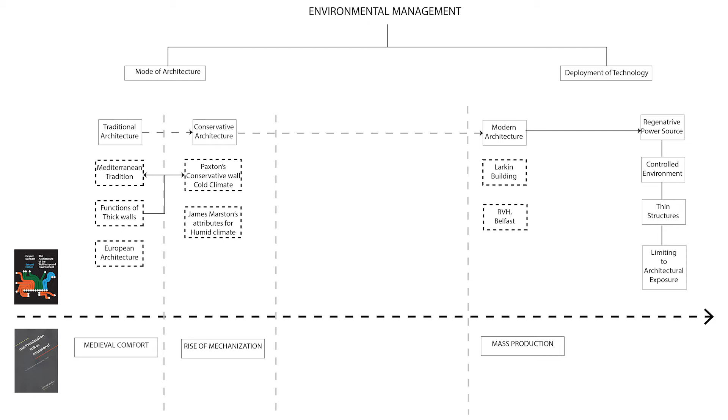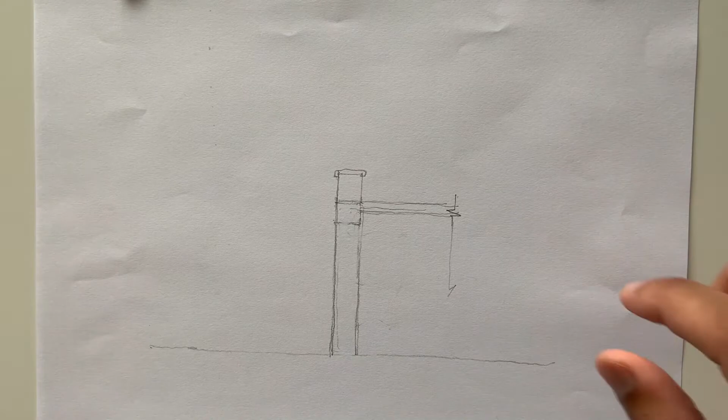Thick and weighty structures offer better acoustic and thermal insulation. These thick walls of a house in a hot climate will hold solar heat during the day, slowing down the rate at which the interior becomes hot. And then after sunset, the radiation of the heat into the house will help to temper the sudden chill of evening.

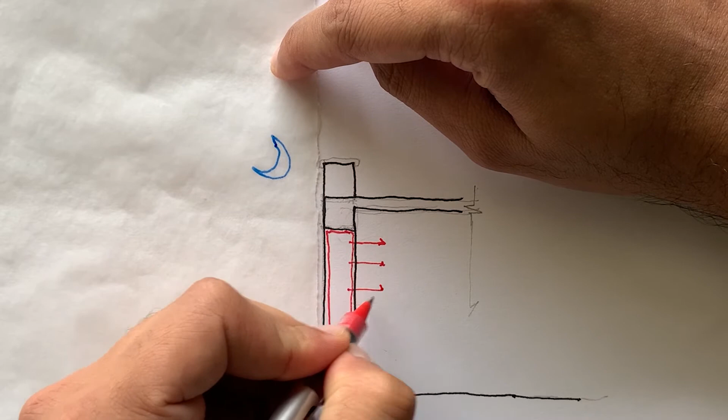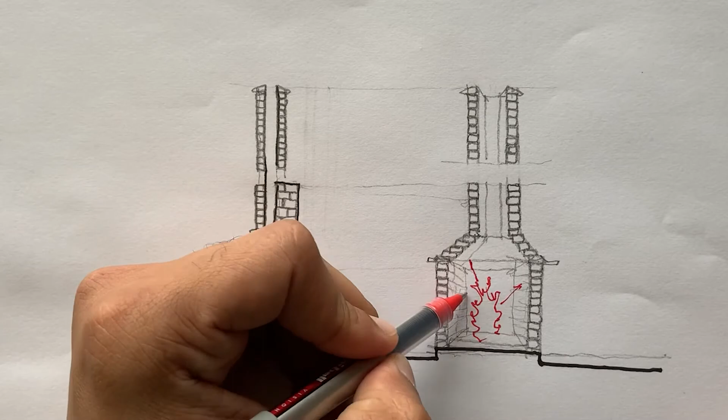Similarly, in European architecture, fireplaces work together with mass masonry and do not depend on solar energy, where the thick wall stores the heat of fire during the day and returns the stored heat during the chill.

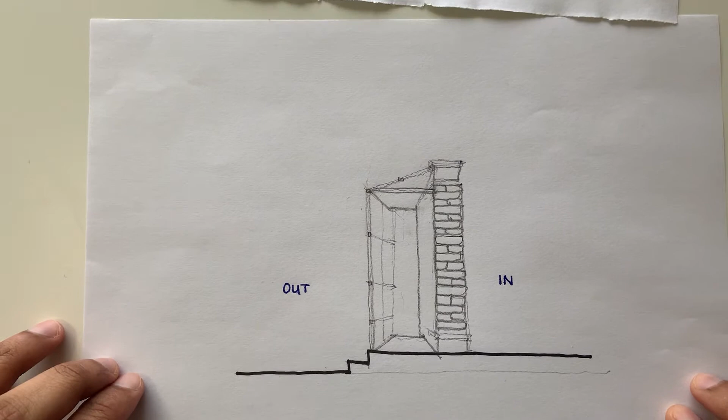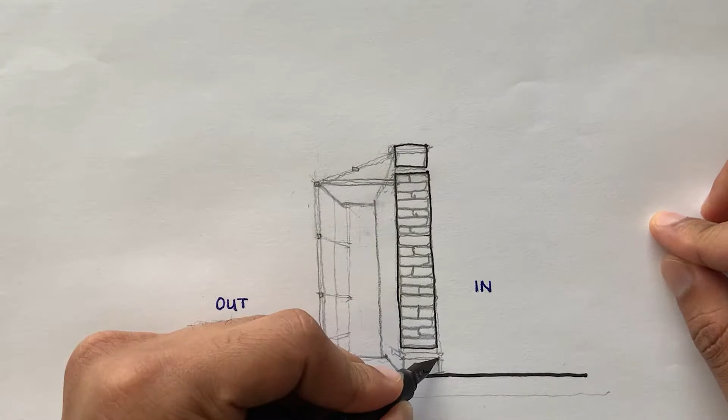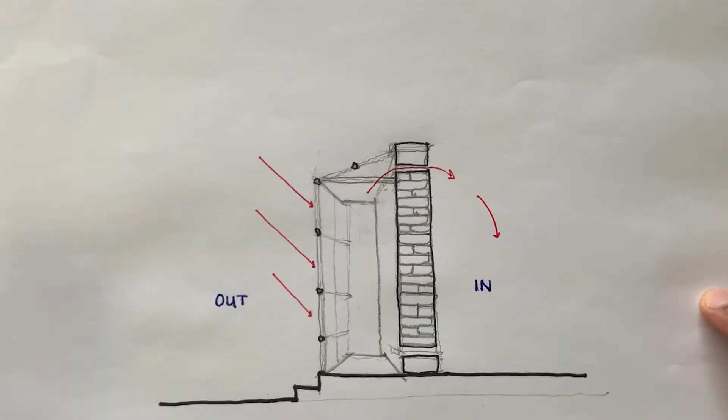Paxton used glass as a filter to discriminate between light energy, which is allowed to pass, and heat energy, whose passage is barred. Similar effects of thermal storage are used in normal greenhouses, and the whole technique might be well termed as the conservative mode of environmental management.

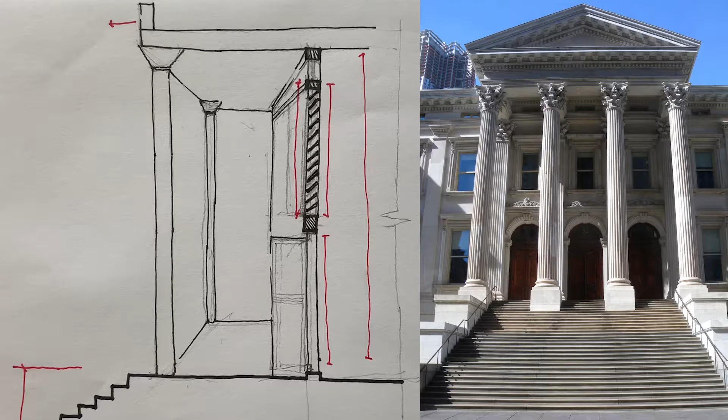For humid climates, the attributes have been summed up by James Marston Fitch as: first, elevated floor for maximum exposure to breeze; second, huge light mass roof to shade subtropic sun and rain; third, large floor to ceiling doors and windows for maximum ventilation; fourth, tall ceilings and central hall for warm weather ventilation comfort; fifth, louvered windows providing any combination of ventilation and privacy.

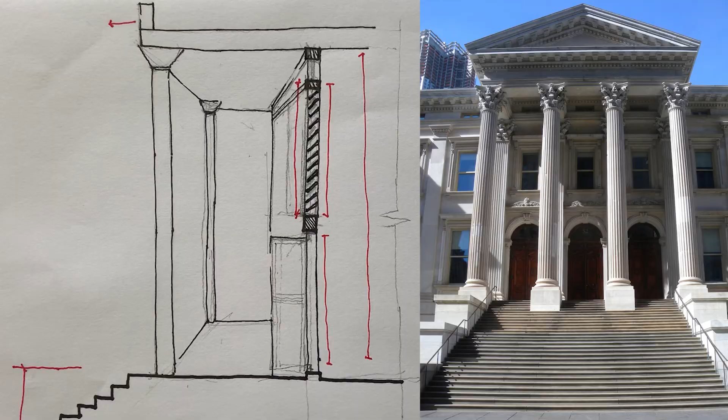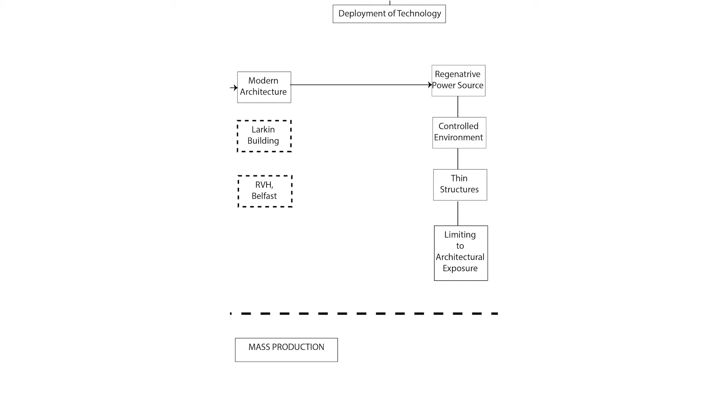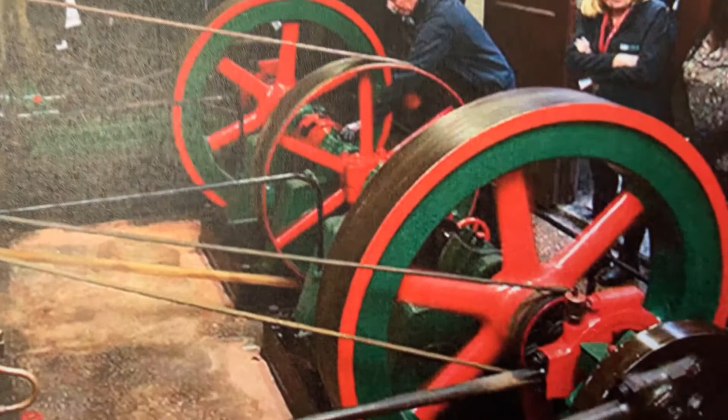With successful use of regenerative power sources, buildings evolved much thinner, lighter, and with control over the internal environment, it was much easier to tackle humidity. Royal Victoria Hospital was the first building to use a regenerative power source with huge and advanced technology, but it somehow failed in terms of architectural recognition.

On the other hand, the Larkin building at Buffalo was the first to use air conditioning in the US. Apart from advanced technology, it was also appreciated for its architectural qualities and elements.

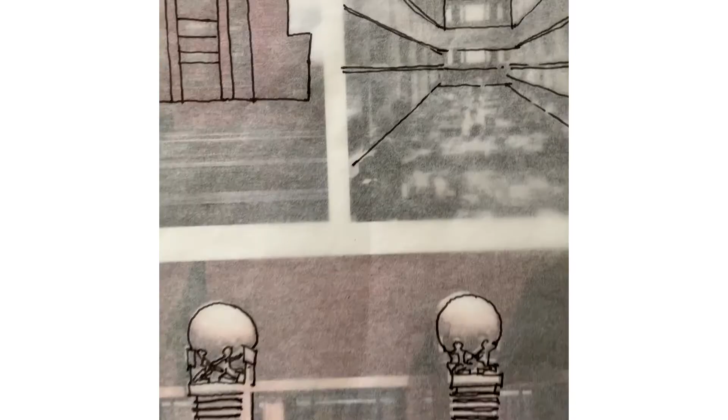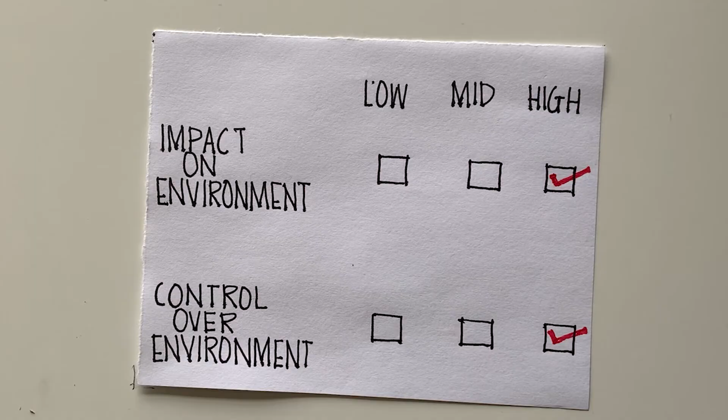Comfort, leisure, and control are the factors responsible for the evolution of architecture and elements surrounding humans, like chairs. Both are aligned in the same chronology to understand their characteristics and interrelation with each other.